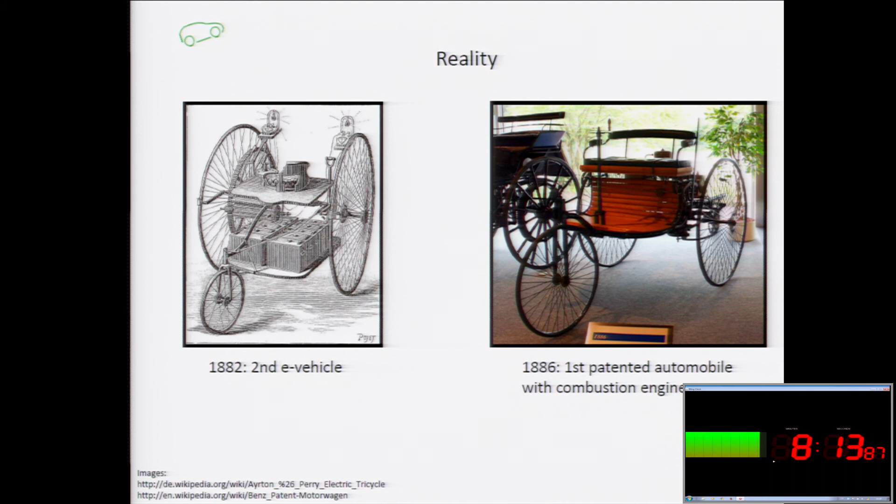Well, when we think about electric cars, it's like science fiction, like, okay, maybe you're talking about Back to the Future or something like that, but maybe not. Well, in fact, the electric vehicle was already developed simultaneously with the combustion engine vehicles. As you can see, in '86, it was the first patent from Daimler-Benz of an automobile. But in '82 was already the second electric vehicle, which was already quite similar to this, supposed to be the first automotive. And it was actually developed in France by Ayrton.

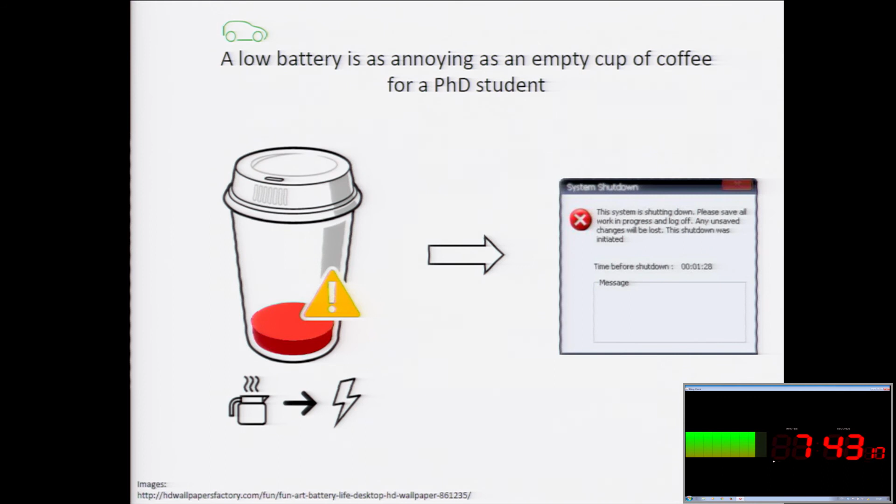Then the next problem with these electric vehicles is it's useless if you can't drive. It's like a PhD student without coffee is useless, we can't concentrate. And what we really need is to know how much coffee is still in the vehicle. And we have to be able to forecast the behavior of the battery. Because otherwise we will have the situation that most people already know with the mobile phone. The charge is full, it shows 100% and 70, but suddenly the phone is dead. And it's most times because the use cases are wrongly chosen.

And for this we have to exactly model, to avoid burns of notebooks, mobile phones, which are most times also because of false use of the charger, but also to avoid the burn of the car. In this case, a Tesla Model S, which burned last year with 3 others, but basically it's still more secure than a combustion engine. And for this purpose, to avoid burning down all the batteries, because they're very expensive for the automobile sector, they start with 4,000 euros, they have no ending of the price. The more expensive ones are 50,000, but they can also cost 20,000, 30,000. It depends what the manufacturer wants to do.

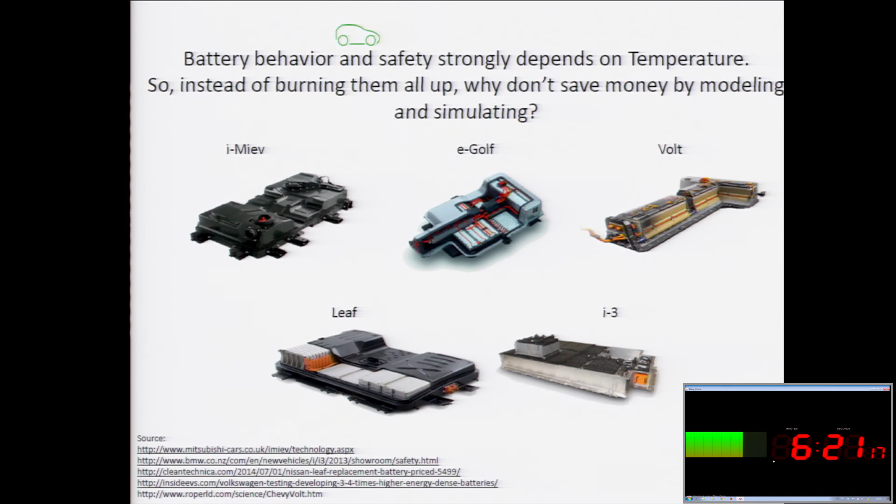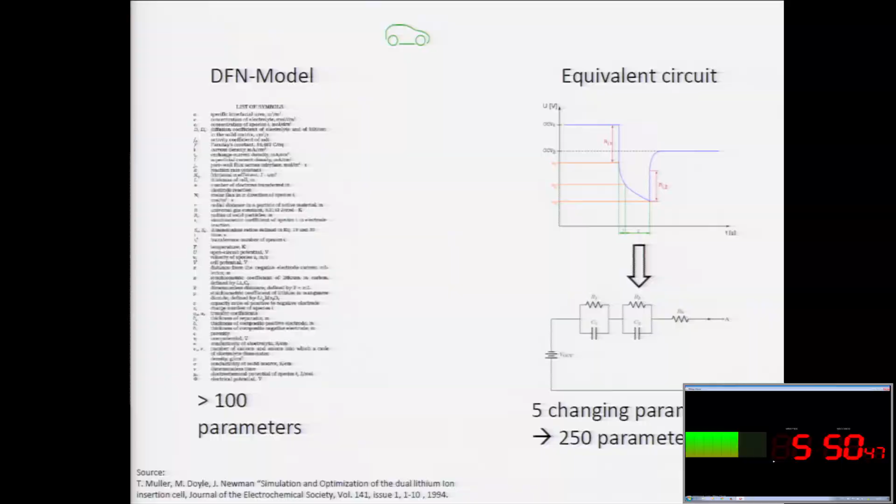And it's just very ineffective to test so many batteries to find the failures in the system. And for this kind, there are models. On the left side, you see the DFN model. It's a chemistry model which needs more or less between 100 and 140 parameters, depending on the extension you add to the model. You get very precise forecasts about how the model works, but it needs a lot of resources. Also, the parameters are very difficult to measure. It starts with particle sizes, transition speeds, whatever.

And for the manufacturer, most times the equivalent circuit is much easier to use and to measure. Even if, as you see now, there are 250 parameters. But if you want to simulate also the charging behavior, it's already 500 parameters. But they're still good to measure. You can optimize it with parameter estimation. And it's quite modular. You can improve the thermal behavior. You can make aging. You can simulate damages. You can do whatever. And you can make a small battery the same as a big battery of thousands of cells like Tesla does. And that's very important for the car manufacturer because at the end, they just want to earn money in an effective way.

Hopefully not like Walter White from Breaking Bad with drug money, but for them, it's not effective to build batteries for 50,000 euros just to destroy them or to make tests that don't work out for this model and the use case of the driver. For example, in Volkswagen, they have a lab which costs 20 million euros just for testing. It's just to have the machines there worth 20 million euros to test 15 batteries, nothing more. It's very costly. And for this, it's very ineffective if they just burn down the batteries.

So as Adrian was saying, car manufacturers want to earn money. And that's what they search. They don't really want to build cars because it's funny. They have a business to run. And the electric vehicle nowadays is not as much of a business. They are losing money each time they sell a vehicle, and they are losing money each time they send a battery to recycle. So what did they think?

They thought, oh, maybe you can do something with the batteries between the end of life in an electric vehicle and before recycling. Because a battery is considered not to be useful for traction services when it has lost 20% of its capacity. So it still has 80% of it. So it's plenty of energy to be used in different ways. And they thought, OK, if we use it again, we can save some money, put it back into the electric vehicle, make the electric vehicle more affordable.

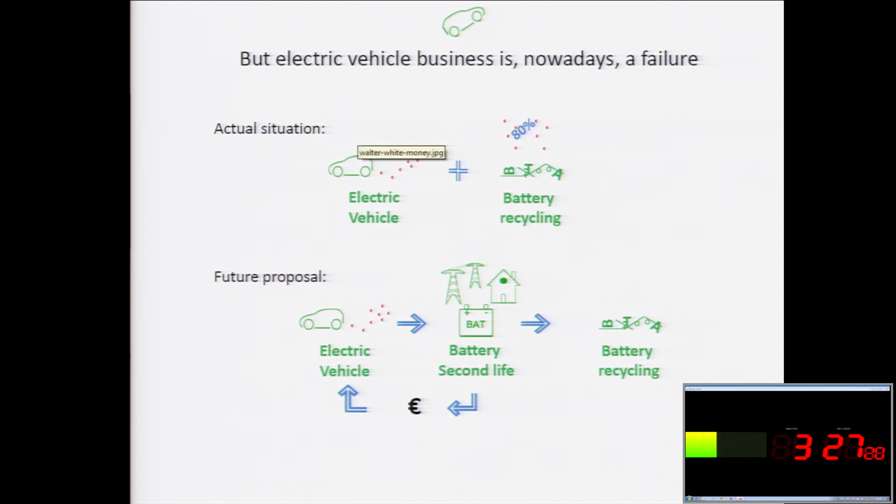So when you're trying to sell something that's second-hand, the first thing that the buyer is going to ask is, OK, and how much time is this going to last? Is it going to last 1 year, 2 years, 3 years, maybe 6? And the car manufacturers right now are saying, have no idea. I don't know. So they thought maybe we can investigate a little bit on that and try to understand the behaviors of this thing.

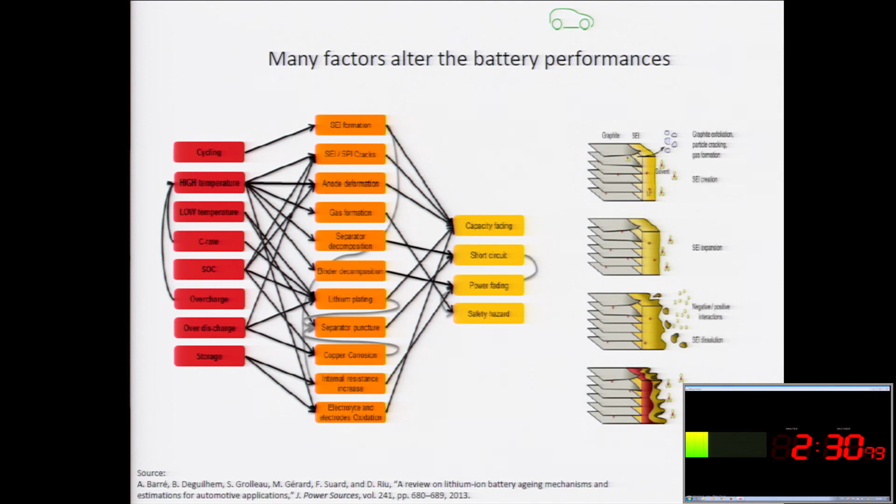So back again, we can see that in the physical explanation of the aging processes on batteries there are plenty of things happening, mixed all around between them. So we have a complete chaos. It's almost impossible to really model and try to do something with that. So instead of investigating these physical parameters, what we do is take from these huge batteries that Adrian was talking about just a small cell, and we test it and we age it in accelerated modes. Different conditions, laboratory testing equipment, etc. And we see how these cells are behaving.

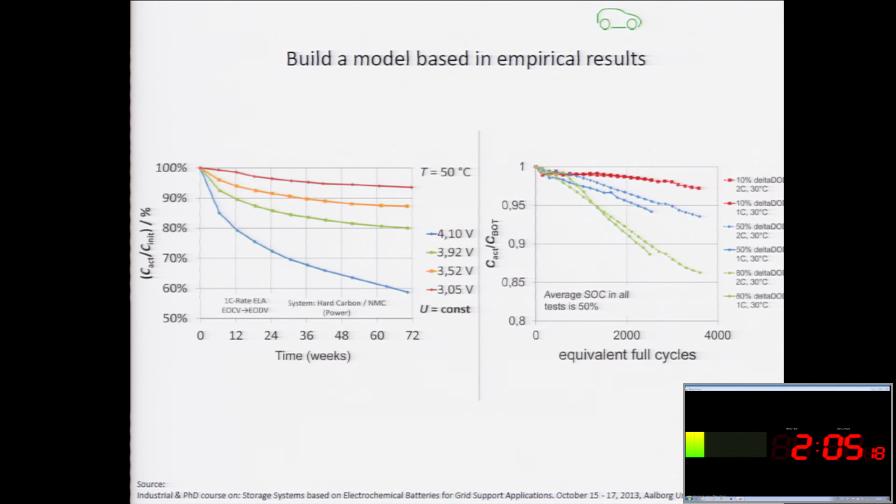And we take some mathematical models of this behavior, taking just temperature, voltage, and things like that, which are much simpler. Then again, we have to think about how these batteries are going to work in this second life application, right? So when we have the behavior, we can put all this into this simple model that Adrian told you about, all this mixed up, and it's the moment of magic, right? Taking the rabbit out of the hat. We run the model, we wait, and we see. And if the lifetime of the battery is long enough to provide some profit, we'll have a happy car manufacturer. And by the way, we'll have our thesis finished, which would be good. Well, thank you very much.